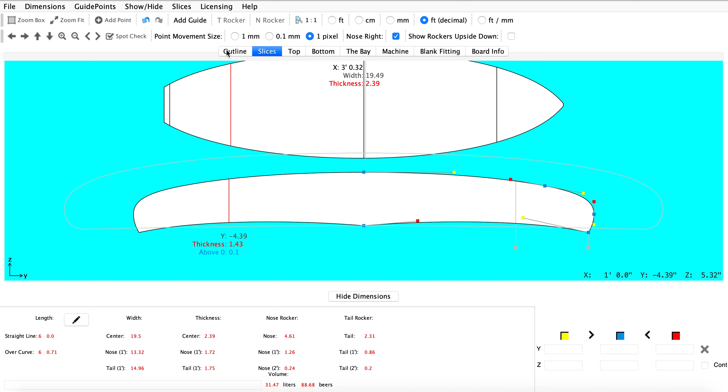So first things first, let us start with a new board. Let's go ahead and do a fish. It's going to have kind of the tail design that I'm thinking might be more appropriate for a hand plane. So just real quick, to get the board to size down to about a foot, we're going to need to delete some slices.

So I think on a hand plane we're going to go 2 feet by, let's say, 10 inches wide by 2 inches thick. Obviously that might not be the ideal hand plane dimensions, but for the sake of this tutorial I think it'll work. So we'll delete the nose slice, the middle slice, and the tail slice.

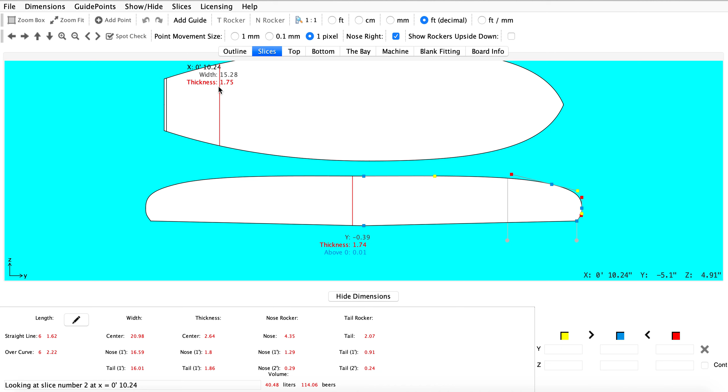When I delete this one, it's going to tell me that we can't delete this slice, but that is not the actual last slice, so we're good to go. I'll just bypass that. So now I have a board that can be resized into something much smaller. We're going to go in increments because if you go too fast at once, the shaper could crash just because it doesn't like what we put in. But that worked.

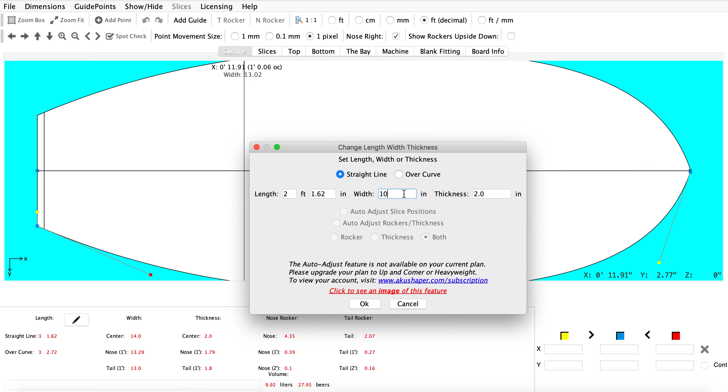So you can see I'm at 3.1 feet, 14 inches wide by 2 inches thick. So go ahead and switch that up again. Let's see if we can get this puppy down to 2 feet by 10 inches by 2 inches thick. Boom. Now we're cooking. So I'm going to go ahead and zoom out.

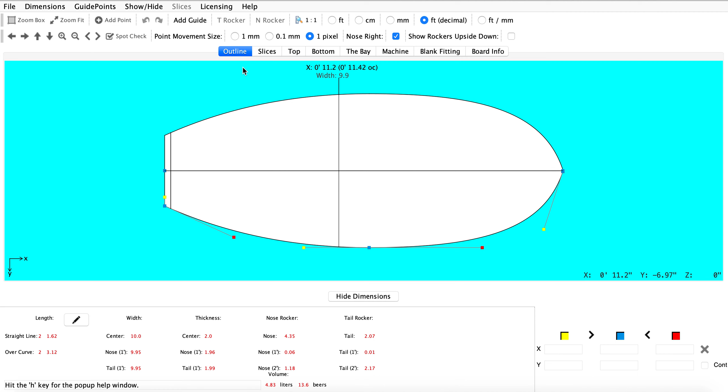Obviously this looks like a shortboard or a surfboard that's of size, but in all reality this is only 2 feet long. You can see it in the bay, that it's a very minuscule board with some serious rocker in it at the moment. So we'll fix that in a minute. Let's just get the general shape of our hand plane going here.

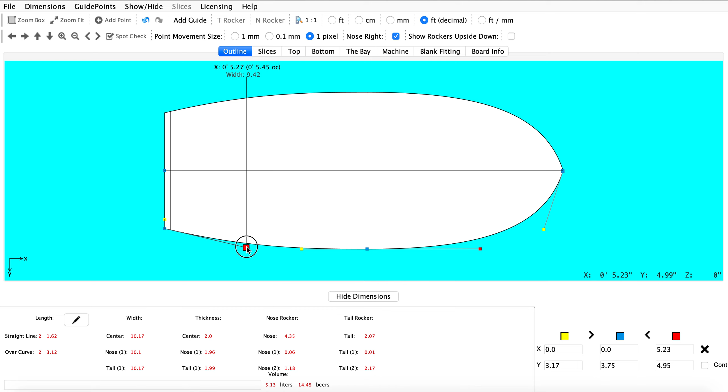So I am actually increasing the width a little bit, but that's a pretty straightforward hand plane shape right there. A little wobble in the rail, but no worries, we can pull that out a little bit and have a play with it. So now a decent outline, still a little wobble, but no worries. Let's adjust the rest of this hand plane. 2 feet by 10 inches by 2 inches thick.

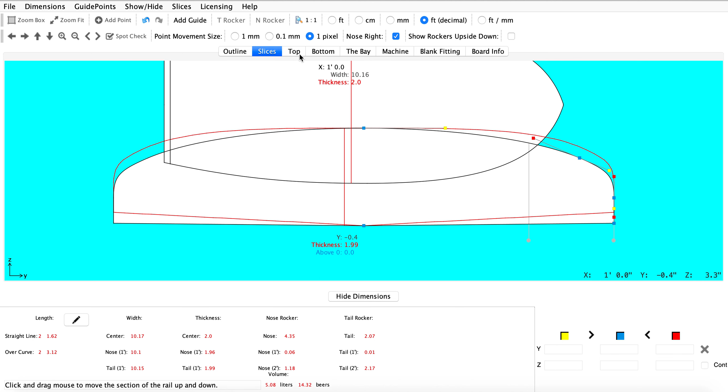Going to the slices, we could add some more slices in if you want to build some concave. Just put it in at 1 foot. Pull your rail line down, what have you. And then obviously we need to fix the top and bottom rail rocker here. So I'm going to use the N rocker, T rocker tools. Start with the tail, just select it and use your arrow key to arrow down.

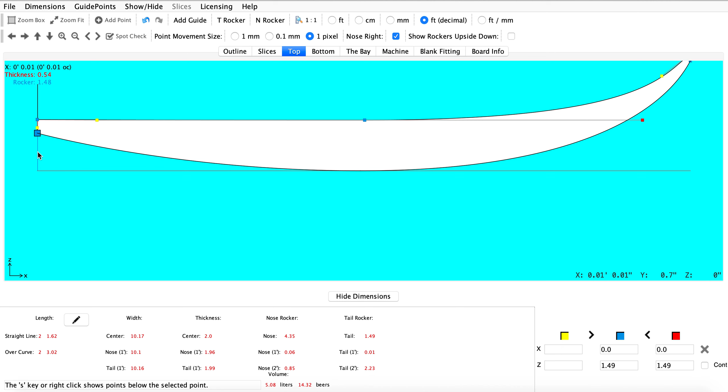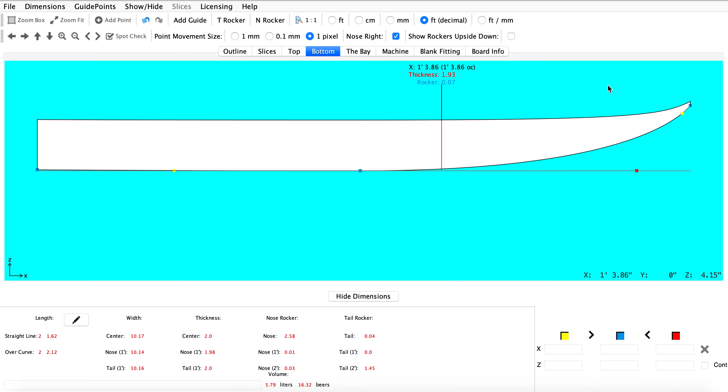I'm going to make this board pretty flat too, so we will navigate to the bottom slice and just pull her down flat. Perfect. Cool. And then again, nose, we'll use the N rocker tool, drop the nose down till we get her about where we want it. And then I'll pull this tab down to start building in the nose shape that I'm looking for in this board here.

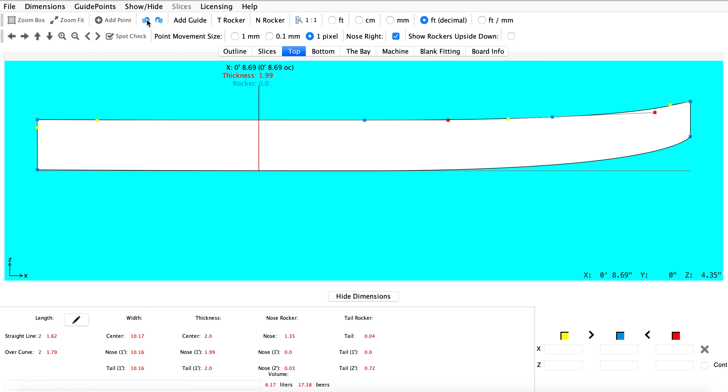So you could add more points along the way here to get this how you want it. I'll leave that up to you guys though. And let's view this in the bay. Nice little hand plane, some V out the tail.

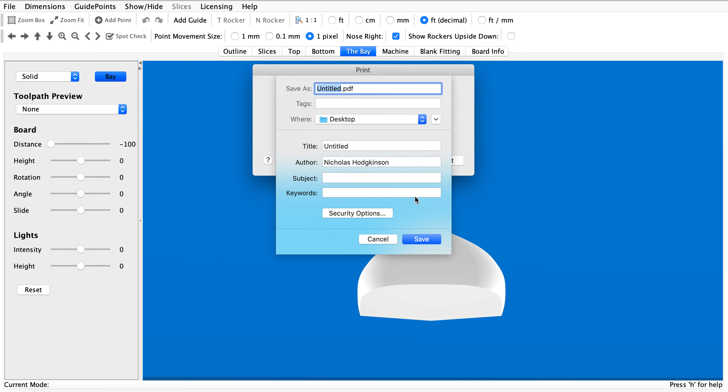So you could export these files, STL, OBJ, PDF, to be used on a table cutter machine, or you could print this outline to be used on a piece of foam. Just 3 pages and good to go. That's how you design a hand plane in AkuShaper.